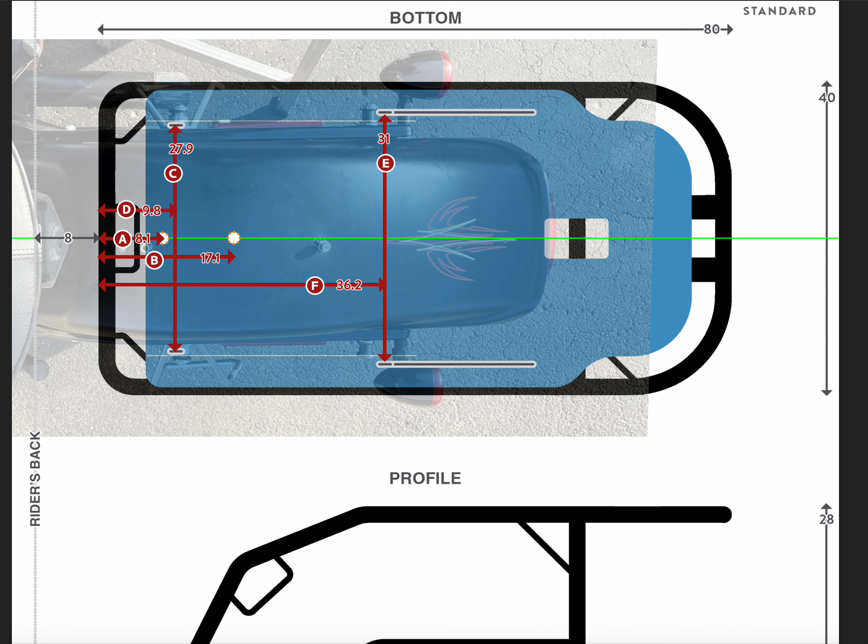We want to make sure that the sizing is just right. So keep that one in mind there. All right, now let's get into this. This looks great. I see your note, so you want to go without the seat. So there we go. Excellent.

And keep in mind with the saddlebags on there, they're going to create a bit of a protection or gasket, you might say, so that the cockpit can sit on the saddlebag, leather or vinyl, whatever that is, and that'll protect the paint. But if you have any concerns about the paint, you can get some rubber sheeting off of Amazon for like $6, and just cut out a piece and lay it over there, and that's going to protect the nice paint. So there's that plan.

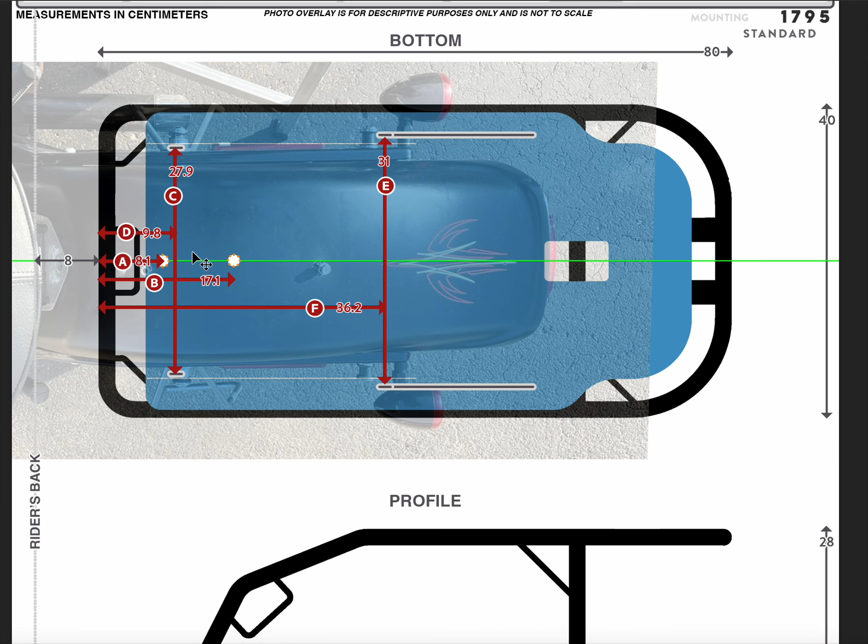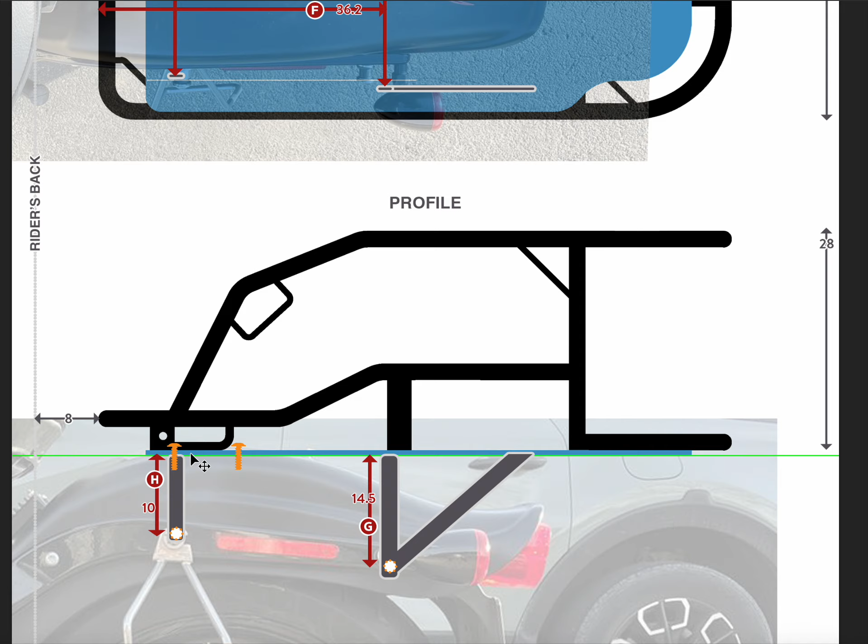That means, as you said, we'll have a full bottom cockpit. It will rest. So it's kind of like a bit of a seesaw idea, right? We sort of have this area that's sitting on the wheel hub, and then we're going to have our brackets here, okay? Now, we do want these bolts in, okay? What's going on with this, right? They don't seem to line up at all.

Well, this is one of these tricky things with the photo. So number one, do not worry about the photo at all, okay? It's meaningless. It's just for description so I can point to things and explain. We all know photos have perspective, and the further away a thing is, the smaller it looks. So we have this issue where the bolts on the sides are further down, and so I've got to zoom the photo in closer to get it to line up. And the more I zoom it in, the wackier this whole thing gets with this guy lining up.

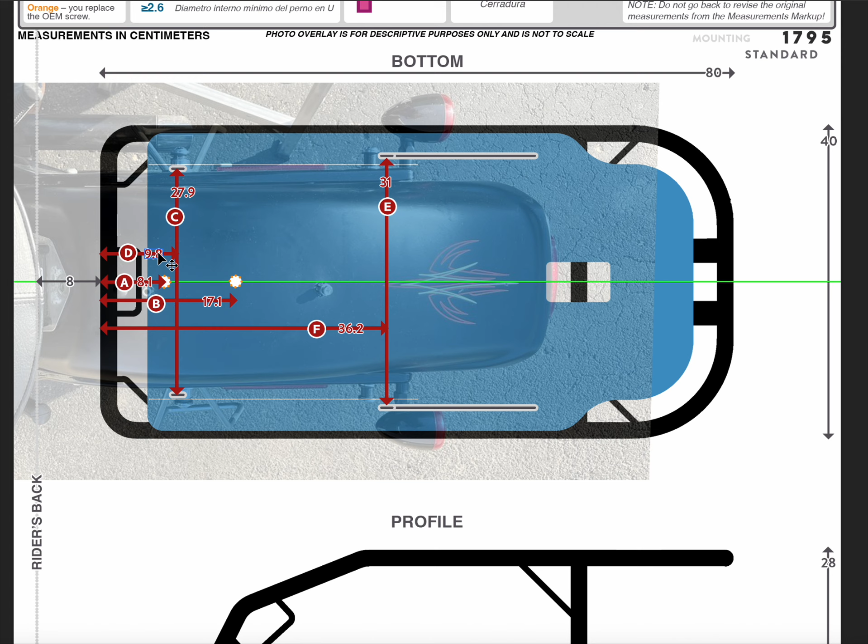So there's no way to win this, okay? There's no way, and we don't need to. All we care about are the numbers. Our builders build to the numbers. We don't care about the photo at all. So please don't let that get in there and mess you up.

So the point is, we've got this bolt back here. We've got the bolt hole up here. We do want to use them, because that creates sort of an anchor. It holds the cockpit front and back in place. We've got the brackets in here that of course are going to be solidly mounted, but then these guys really lock it in its place, so that there's no front-back or rotation or anything like that that can happen.

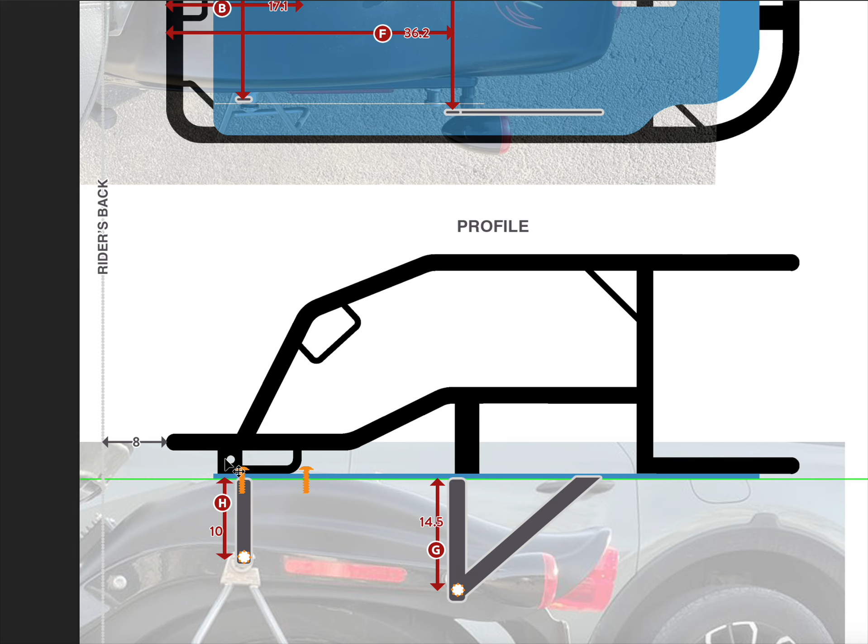It's valuable, okay? And so the first thing I want to mention is, when you take that board, that level, that you use to do these vertical measurements, do keep in mind where these different features exist on the wheel hub, because if they are further down on the wheel hub, let's say back here, then the bolt actually goes out at an angle. And so you want to use a pen or pencil. You put it into the bolt hole, and you can see the angle that it creates, because that will be relevant, right?

Like the hole might be here, but the angle may have the bolt sticking back a little bit, and we want our bolt hole to be lined up with where the bolt is at this level, right? So you can just imagine, let's say this guy goes like this, right? Then we want the bolt hole here, not here. Seems very subtle, very small, but it's worth taking into account, so that that bolt hole really lines up with where you need it. Okay.

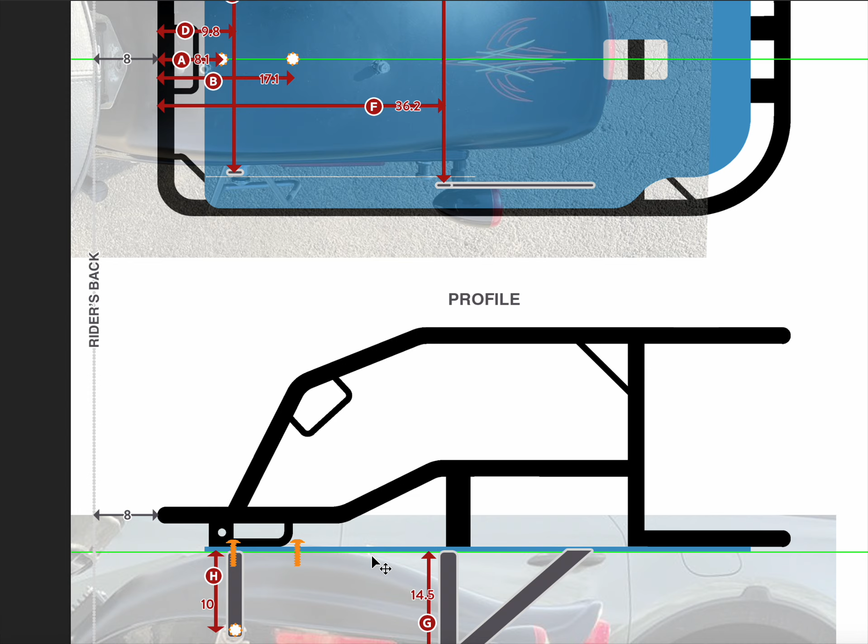Good. No stress there, no issue. Just keep that in mind because you're going to have your level here. We're going to have solid brackets going down just like you see. This one will be in a V shape so that we provide 2 points of support, okay? And excellent, okay? So let's get into this then.

We're going to have the side-to-side measurements the same as what you provided. These front-back measurements are different, and that's where we're going to start with this. So we took your first measurement, went to the rider's back, and we moved back 8 centimeters. That's where we put the front of the cockpit. So that's what you're going to do now. You will be seated in the normal riding position on your bike. You'll measure back 8 centimeters, mark that location on the wheel hub, okay? That's the front of the metal frame of the cockpit.

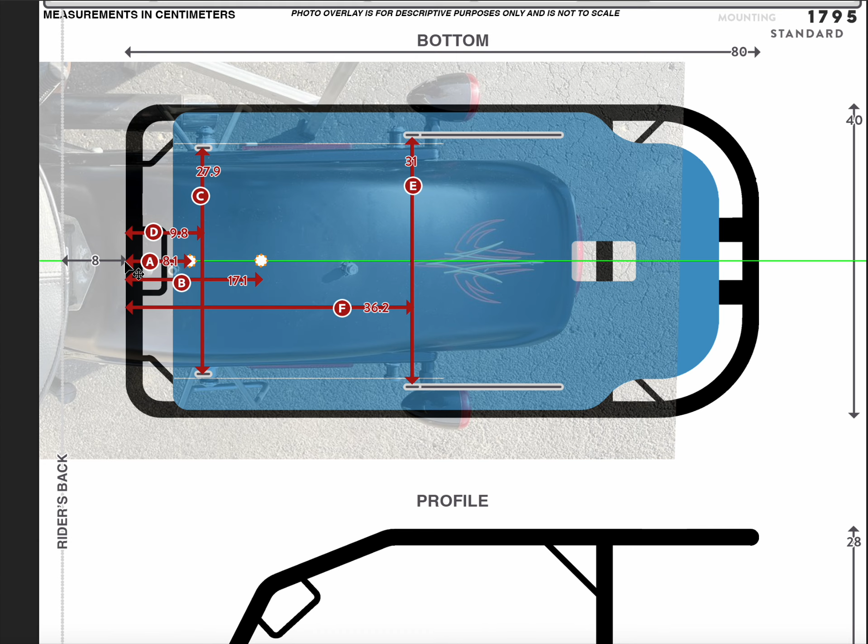Now, when it's upholstered, you're going to lose about 3 centimeters, so it'll expand. But we're not worried about that right now. We're talking about the metal frame. So 8 centimeters behind your back. Mark that location. Now, that's the new starting point for all of our front-back measurements. That's why they look different.

So let's do it. Front brackets, right, just on the outside of the fender, side to side, 27.9. Okay, so all that stuff gets pulled out. The bracket slides in, everything goes back in. Okay, that's the plan. 27.9 and then 9.8 from the front of the cockpit, right? The rear brackets, 31, so it all goes out a little bit wider is what we're seeing here. 31 side to side, and 36.2 from the front of the cockpit. Okay, so that's our double check here.

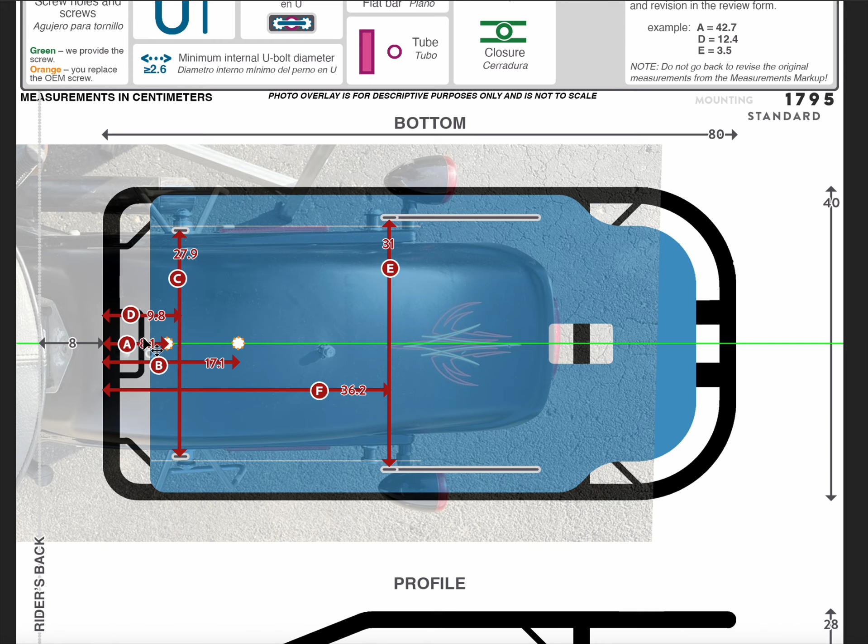Now this front bolt hole, we have it located 8.1 from the front of the cockpit, and then this one that looks way off, 17.1, right? So again, this is where the rubber hits the road. We're gonna come at this with fresh eyes and check these numbers, okay? Looking good.

And then our vertical. So the front bolts are clearly higher. We've got that at 10. The rear bolts are lower. We have them at 14.5. That should create a level, a cockpit level, right? A sort of horizontal cockpit level for us.

All right? Good. Now, there's no question that the cockpit, standard size cockpit, is going to extend out to the rear, but we're going to have a good portion of Zena's weight right over the sweet spot here on the wheel hub, and then that lower back kind of swings into the butt down here for less and less of the actual load, okay? So head, torso, front paws all over the wheel hub, right where sort of the passenger seat area would be. That's what we want to see.

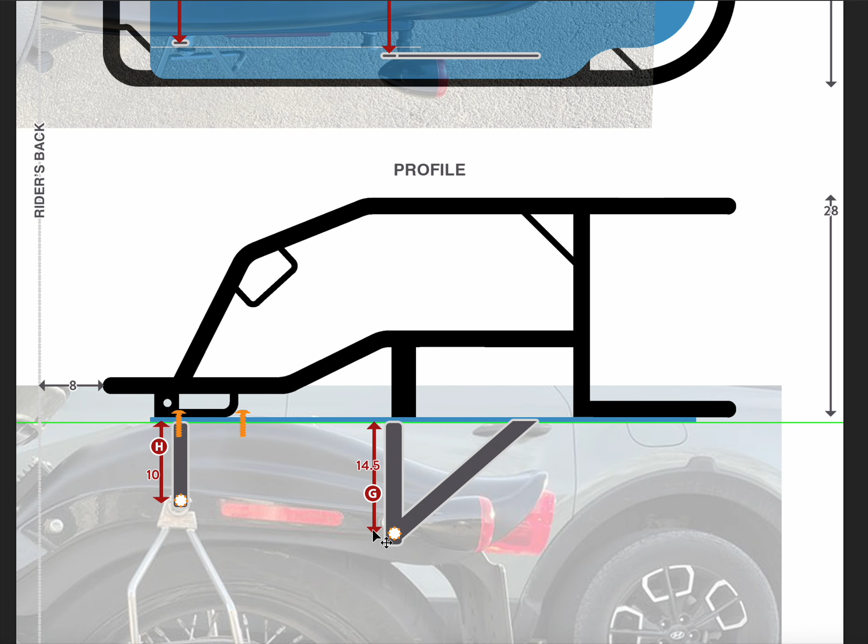Okay, we're keeping it lower by resting on the wheel hub, and of course supporting the load not only with the wheel hub but also with these brackets, and then these central bolts that will provide some additional anchoring. Okay, so there we go.

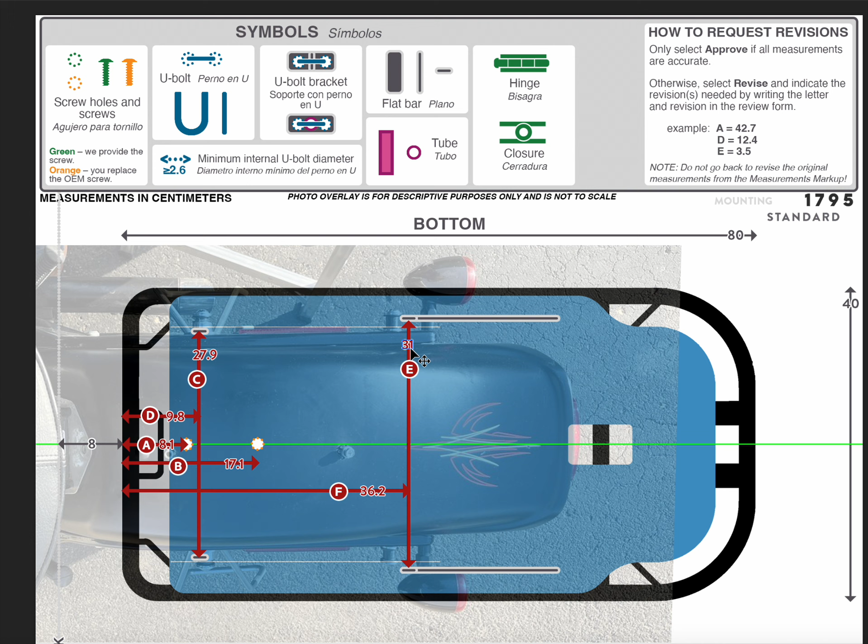Sherry, any questions? Anything's unclear, you reach out, let me know. The way to move forward here is any changes you want to make, you're going to click revise on the build diagram, the mounting diagram, the form, right? And then you tell me which letter you want to change, what's the new measurement. I will update and revise the mounting diagram accordingly. And when we have a version that requires no changes, you're absolutely happy with each of these, that's when you click approve, and that's what we build to.